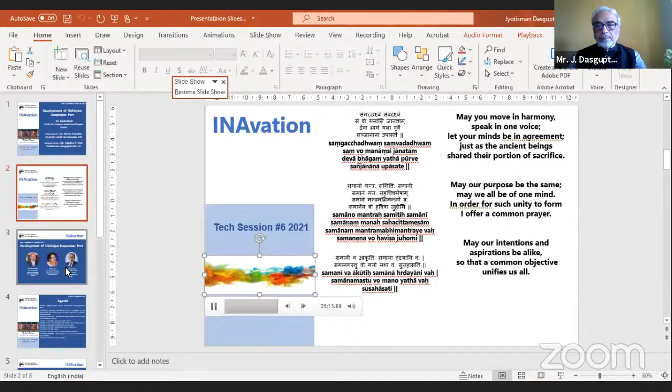Thank you very much. So we are indeed very honored to have Mr. Madhu S. Nair, Chairman and Managing Director of CSL, chairing the session today. And we are extremely honored also to have Dr. Malini V. Shankar, the Vice-Chancellor of IMU with us. The presentation is going to be carried out by Dr. Jayakumar, the Managing Director and CEO of Vizhinjam International Port.

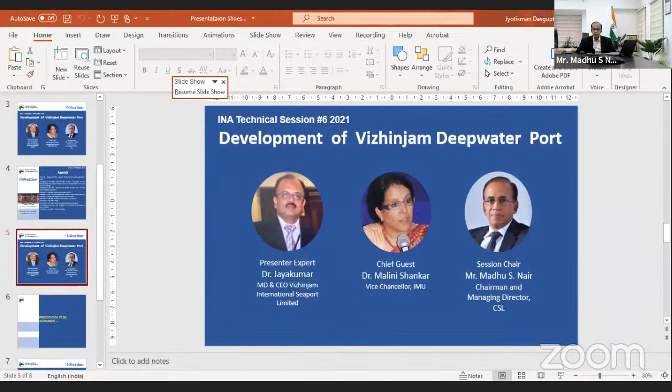For me, it's also a matter of privilege to introduce Dr. Jayakumar, whom I have personally known for long now. Dr. Jayakumar, again, one of the key personalities in the Indian port infrastructure space today. Today, he is Managing Director and CEO of the Vizhinjam International Seaport Limited. For us, coming from Kerala, it's a matter of added pride that this major seaport is coming up at the southern tip of Kerala.

I'll try to be brief when introducing Dr. Jayakumar, because his credentials spanning across the technical and the managerial space is extremely large. More than 3 decades of experience in the planning, design, and construction of ports and harbors in India and abroad. Dr.

Jayakumar is a topper from the University of Kerala in civil engineering, from the College of Engineering, Trivandrum, and subsequently he has done his MTech and PhD, both from the Ocean Engineering Center in IIT Madras. Started his career with the Kerala Harbour Engineering Department in 1981.

Served the government of Kerala in various roles, and in view of his qualifications and experience in the maritime sector, was appointed as Special Private Secretary to the Honorable Minister for Ports in Kerala in 2001, and Advisor Ports to the Government of Kerala. He has also had a brief stint with the Kerala State Maritime Development Corporation, and has been an active player in India's foray into the wave power space. He has been part of the IIT Madras Department of Ocean Engineering foray along with ANERT in this area. And Jayakumar was instrumental in conceptualizing, design, project structuring, and financing for the Vizhinjam International Seaport Limited.

So I have a few slides, but the way in which the project was introduced by Mr. Madhu Nair and Professor Malini Shankar, I think most of the points have been pointed out, I would like to say during the course of my presentation. So to start with, I would like to introduce my presentation with a phrase about our country: the future is here.

I would like to take you to a year where India would be by 2050. These are just my aspirations, and I hope many of you would concur. India would be a superpower by the year 2050, accounting for 25% of the GDP of 9 developed nations of the world. And now coming back to the present situation where we are.

What would India be by 2030? Indians would have reached every corner of the world, be it services, manufacturing, engineering, retail, or banking. Even now, we are in every part of the world.

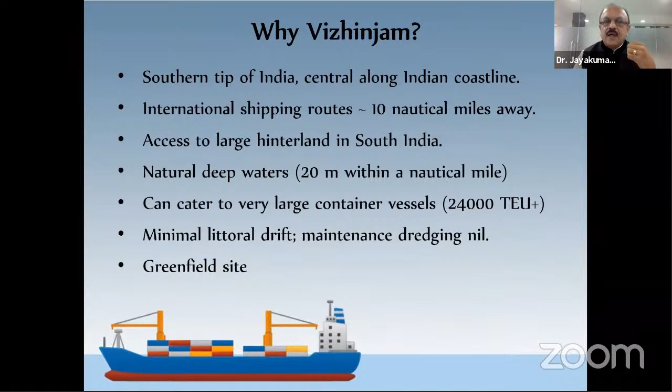As a result, the developer could have flexibility in designing the layout of the terminal, the berths, and things like that.

The same advantage is there for the Hambantota terminal, which is already there, but we have a lot of geopolitical risks associated with Sri Lanka. So Vizhinjam looks promising to be developed immediately as a transshipment hub for India.

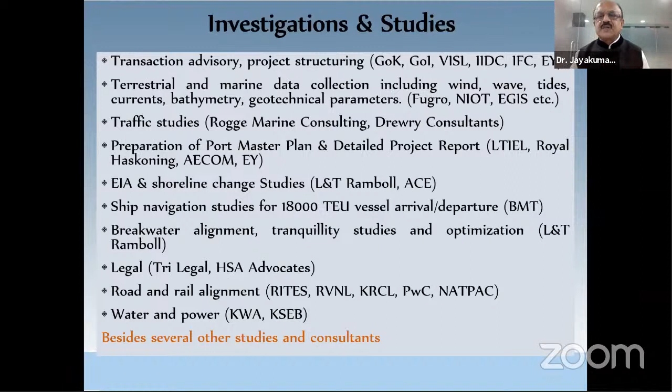Before the commencement of the port, we did a lot of numerical studies through various consultants, and we have seen that there is hardly any erosion that would happen as a result of the port development towards the north. Only some accretion would happen to the south of the port in this region. That is one of the very promising aspects as far as this port was sited at this particular location.

Coming to the explanation of this port, this is the first phase, which consists of a 3,100 meter long breakwater. This comes 300 meters away from the existing fishing harbor, which could be seen here. The port is being connected with National Highway 66 with a 2-kilometer road connectivity, and there will be a railway line connecting to the nearest railway station, Balaramapuram, which is 11 kilometers from this site.

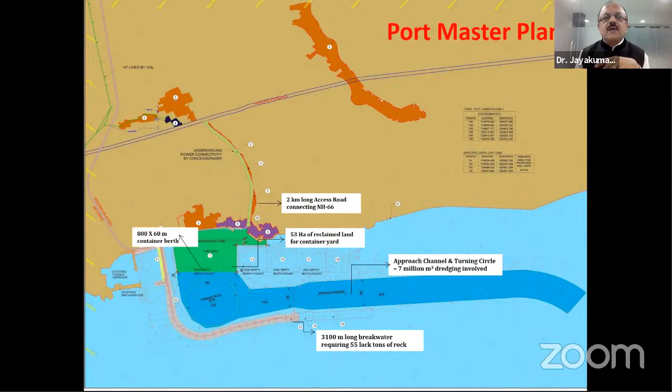The approach channel and turning circle involves dredging of 7 million cubic meters. This is the capital dredging involved, after which no maintenance dredging is required for the port.

This is the port in various phases. In the first phase, this port will be ready to handle about 1 million TEUs, and in the subsequent phases 2, 3, and 4, ultimately the port will be able to handle about 3 to 4 million TEUs, depending upon the efficiency of the cranes and other equipment which the concessionaire would deploy at the site.

As I mentioned earlier, this is our existing fishing harbor, and 300 meters away is the start of the breakwater, which is a rubble-mound breakwater that will be done up to this point in the first phase, for which government is investing. Out of the 7,700 crores total project cost in the first phase, 5,500 crores is being invested by the government of India, which is basically a commitment to develop the basic infrastructure, so that the concessionaire will only have to bring in investment for setting up the berth construction, reclamation, and the equipment for the port.

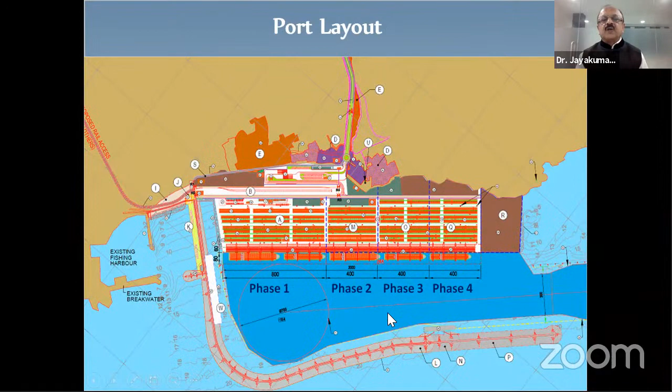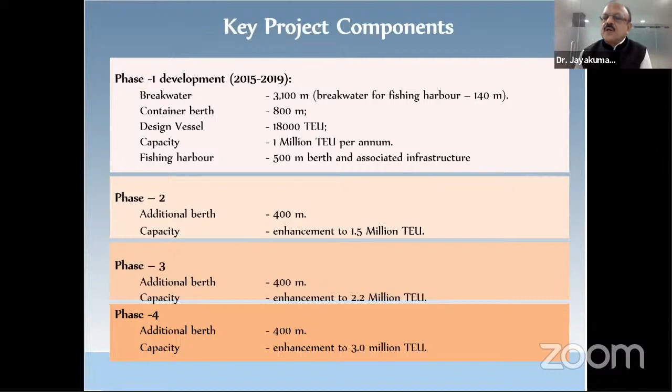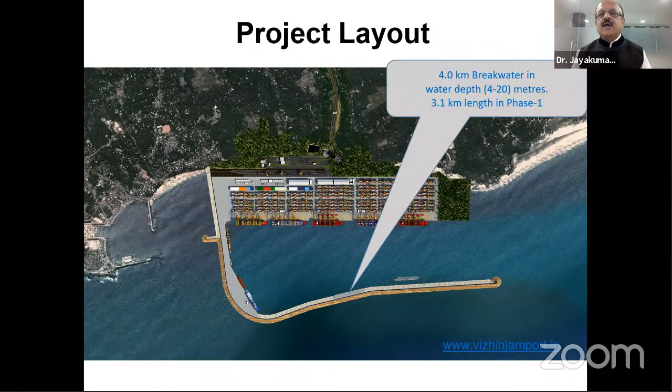So these are the various components in the various phases. The first phase will have an 800-meter long berth, which can cater to design vessels of the order of 18,000 TEUs, with a capacity of 1 million TEU per annum. This will subsequently be enhanced depending on capacity augmentation, which ultimately in the fourth phase, as per our designs, is 3 million, but the port will be able to handle up to 4 million at the end of phase 4. This is the master plan when developed in 4 phases.

It will have a 2-kilometer long container terminal, superimposed here on the Google map, with 110 hectares of reclamation, of which 53 hectares is in the first phase. There will also be a 500-meter long fishing jetty for the local community, because this region has the most densely populated fisher folk in Asia.

As a result of the project, the local fishing community has been affected quite a lot, and they have been and are being compensated by the state government through employment opportunities and compensation for their loss in fishing.

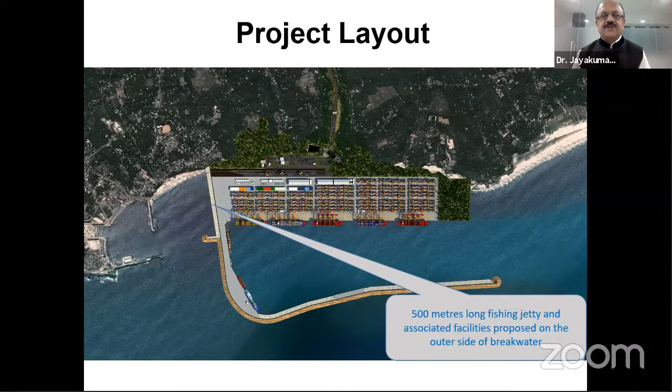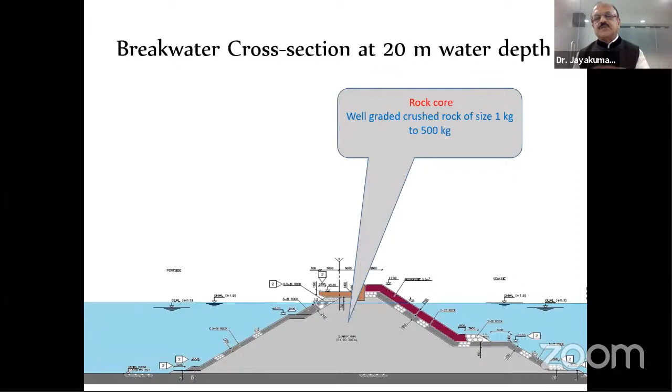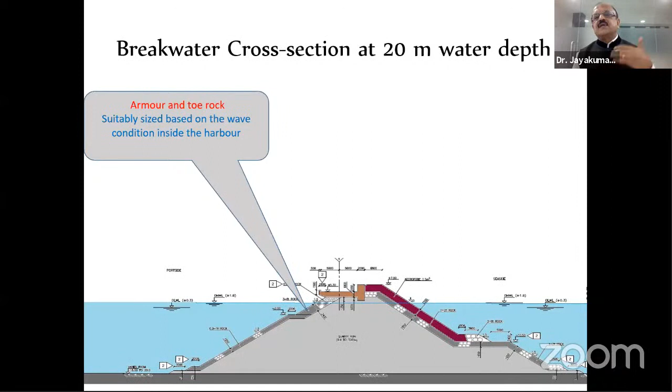This is a rubble-mound breakwater, and this is a typical cross-section shown at 20-meter water depth. The major portion will be the core, consisting of 1 to 500 kg stones, and the outer armor layer will be of various grade stones with 1 to 2 tons, 2 to 4 tons, and 3 to 6 tons.

On the outer face, where the breakwater takes the brunt of the waves, there will be concrete armor units, artificial concrete blocks called ACCROPODE, which are the patented concrete layer innovation of France.

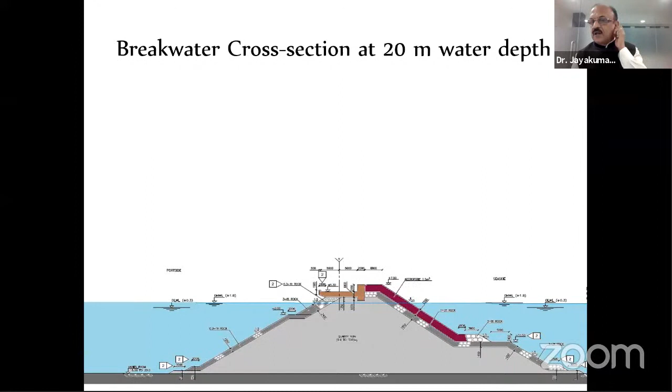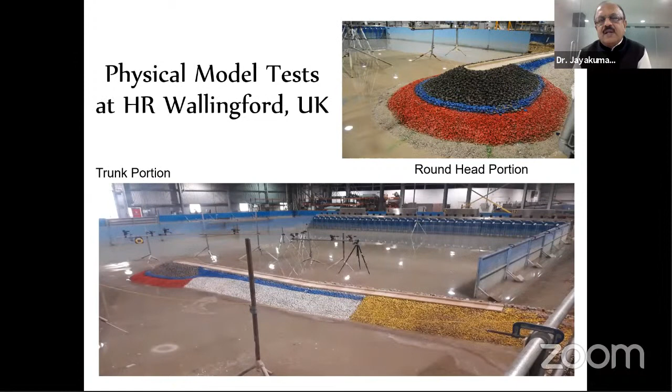The breakwater is designed by a Danish group called COWI, for which model studies have been conducted at HR Wallingford, one of the world's most advanced labs, located in the UK. So the model studies for the breakwater were done at the Wallingford lab, and the breakwaters are tested there for various conditions.

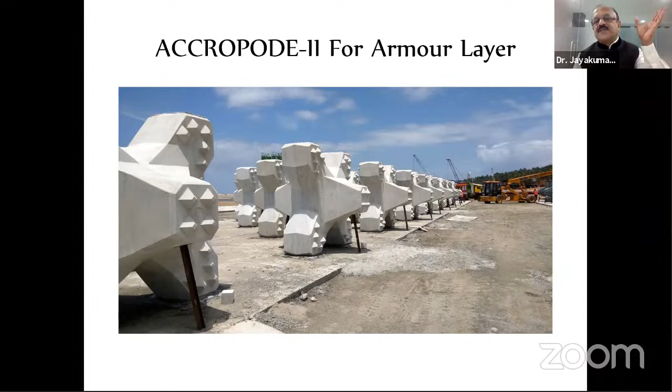These are the ACCROPODE, which are cast at site to form the outer armor layer to withstand the maximum waves, which can be of the order of 8 to 10 meters during extreme wave conditions. Each block weighs 13.5 tons and will be placed in 2 layers along the outer face of the breakwater.

So 40 plus 18 is 58 meters, plus another 5-6 meters above. That gives about 64 or 65 meters as the length of the pile, including the foundation pile that has gone below. On top of the piles would be the transverse beams and cross beams supporting the deck slabs, on which rails would be laid for supporting the container cranes to handle the cargo from the vessels.

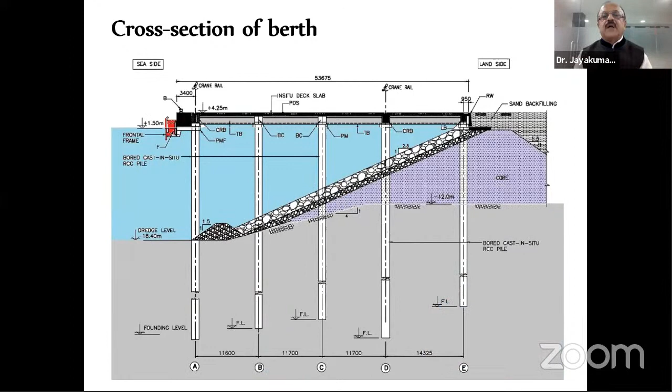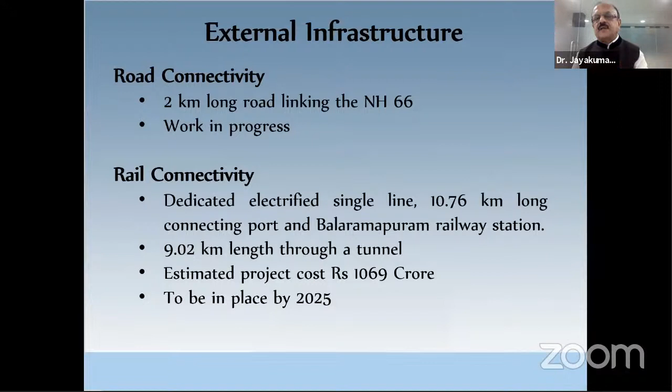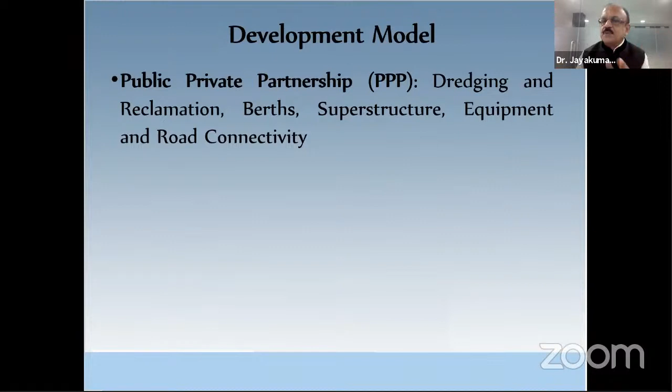Road connectivity, as I've mentioned, is a 2-kilometer road already in progress, and rail connectivity will be in place by 2025. The development model is through a public-private partnership, where the PPP component consists of dredging and reclamation, berth, superstructure, equipment, and road connectivity, which is being done by the concessionaire.

The state support is for the breakwater and fishing harbour, which is around 1,500 crores. Then comes the VGF, as Dr. Malini Shankar has put it - this is the viability gap funding.

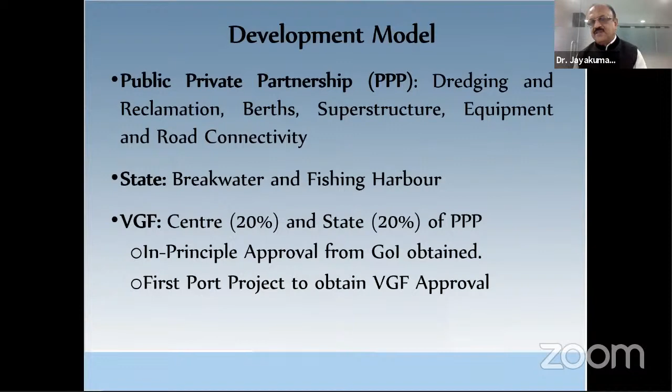This is the first VGF-approved project by the Government of India. The VGF funding component will be 20% from the Government of India, for which we are at advanced stages of securing this VGF from the central government. An equal share of 20% has to be put by the state government. This works out to 818 crores from the central government and 818 crores from the state government, together 1,635 crores, which was the bidding parameter quoted by the concessionaire in terms of grant. That grant is the viability gap funding to be given to the concessionaire during the stages of development and construction.

A concession agreement was signed based on the model concession agreement prepared by the State Planning Commission. The concession period is 40 years, including a 4-year construction and design period, starting from 2015 when the agreement was signed. There is an extension of 20 years depending upon capacity augmentation. The scheduled completion date was December 2019, and now it's delayed.

The cure period given to them is also over, so we have issued notice to the concessionaire for penalty or damages to be levied. They are going ahead with the construction, and we are also supporting them, because in the good spirit of the public-private partnership agreement, we would like the port to be built without further delay. This is the total cost of the project.

The 4,089 crores is for the total PPP component, and the rest goes from the Government of India and Government of Kerala. If you look at the total project cost, almost 68% is investment from the Government of Kerala, and only 32-33% is from the private sector. That is the commitment of the Government of Kerala with regard to the project.

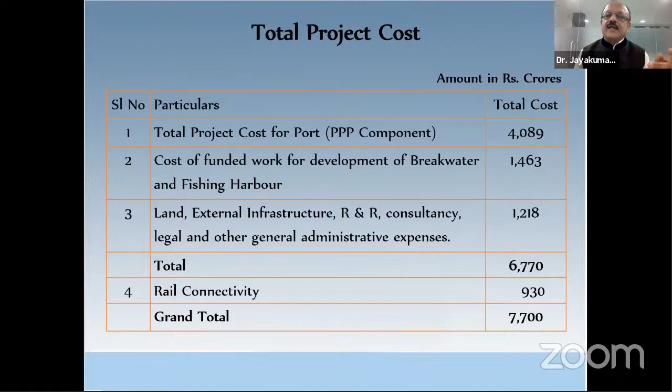For the land acquired and transferred to the concessionaire, we have already spent around 850 crores, including the land cost and the rehabilitation of the landowners.

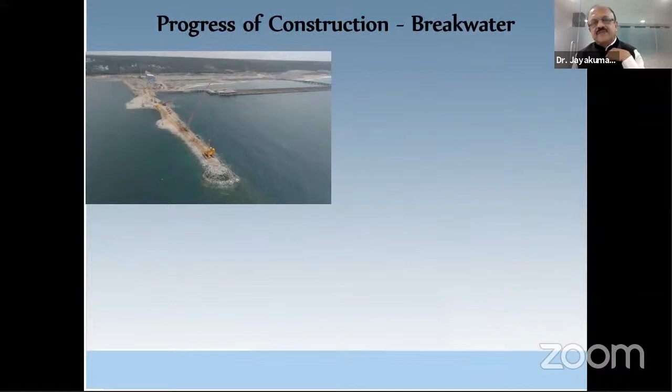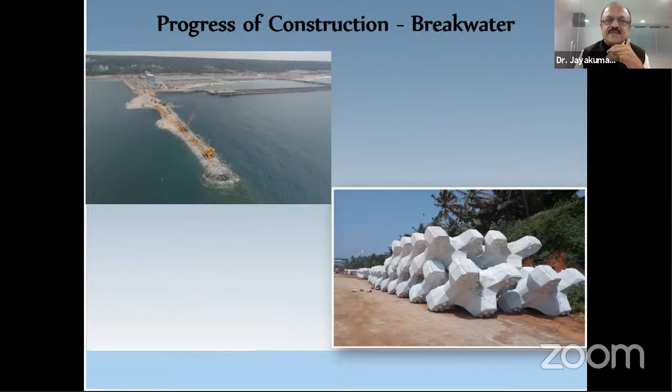This shows the progress of construction of the breakwater. On the left side you can see the breakwater, which is in progress, and these are the accropodes. Around 20,000 accropodes are required, of which around 11,000 are already cast and in place. Materials are already being stacked at site for the breakwater of various grades.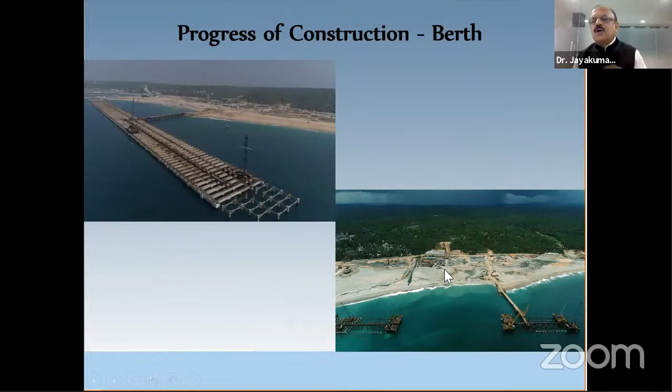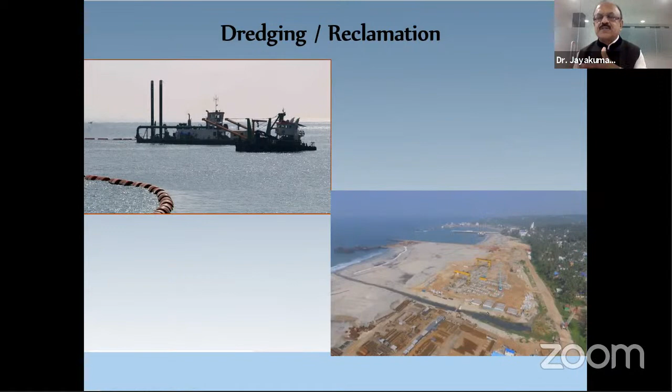On the right side you can see the reclamation, which is already done by the concessionaire. The shoreline can be seen behind it. This is the dredging to create the land - you can see the land which has been created. This was the original shoreline, and all this land has been reclaimed, but there's still a long way to go. About 60% of this land has been reclaimed, and the container facilities are all coming in. The railway yard within the port will come here inside, and other storage facilities and port administrative buildings are all in place.

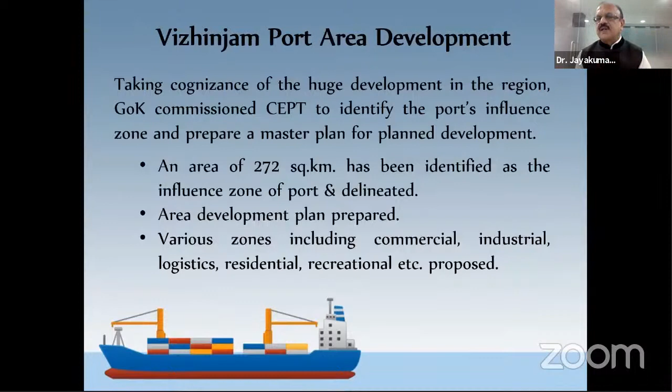Taking cognizance of the huge development in the region, we identified and deployed the Center for Environmental Planning and Technology of Ahmedabad to do an influence zone mapping for the area. An area of 272 square kilometers has been identified as the influence zone of the port, and an area development plan has been prepared, delineating various zones for various purposes besides port development - zones for industrial, residential, or recreational use. This is the area which has been delineated.

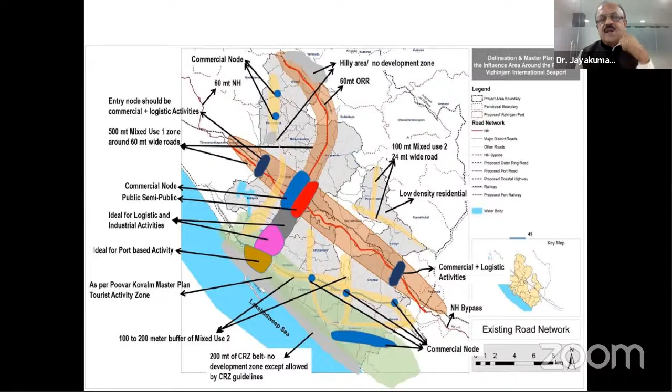Another initiative of the government is to set up a 2.5 kilometer wide corridor with a 60 meter wide right of way road bypassing Trivandrum city, to connect the port with the national highway bypassing Trivandrum. With the support of the Government of India under the Bharatmala project, the government is going ahead with this.

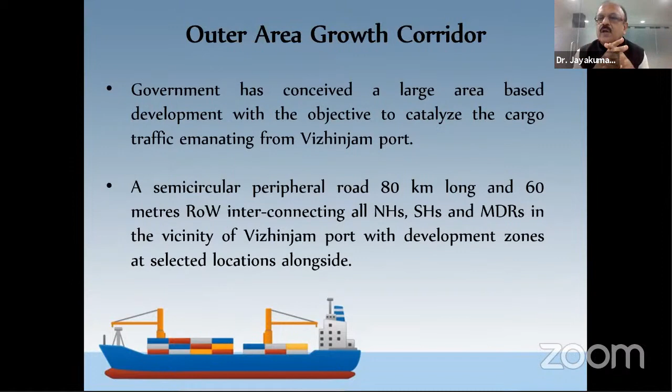This will have a 2.5 kilometer wide corridor on either side of the road, with zones for industries and development on both sides. This is also being done parallelly by the state government. This is the layout of the outer area growth corridor, which bypasses Trivandrum city to go to the next district, Kollam, from Trivandrum.

Vizhinjam, again, we are going to be a smart port. If you look at the challenges faced by ports today, we can bring it under three heads. The first is gigantism, concerning the ever-increasing sizes of vessels. Ship sizes are becoming large. To give an idea of scale, the largest container ships that come to the port are of the order of 400 meters long, equivalent to the size of 4 football pitches.

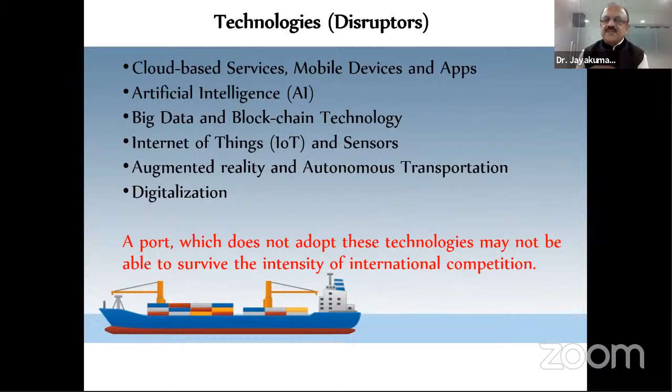Then comes augmented reality and autonomous transportation, for which you need a lot of innovations and technologies. So a port which does not adopt these technologies may not be able to survive the intensity of international competition.

If you look at the smart port concept, port environments have to become intricate partners - a link in the whole ecosystem that includes port terminals, authorities, shipping lines, trucking and logistic companies, and storage providers. This is the ecosystem we can see. To be truly effective, stakeholders have to do more than simply adopt these technologies on their own - instead they have to be part of it, embracing platforms and services that make it easier to work together on the same platform.

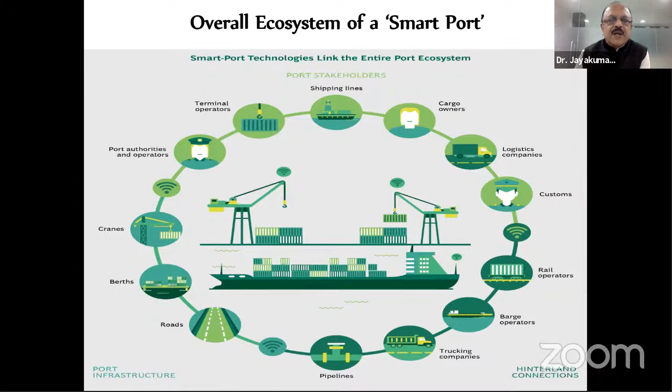These platforms and services will let individual partners expand their businesses without adding substantial new infrastructure or equipment. This is the sort of smart port being thought of, but only discussions have started. In 2 years, when the port operations are in place, Vizhinjam would be a smart port to look at, with state-of-the-art technology, serving as the prime transshipment terminal of the country.

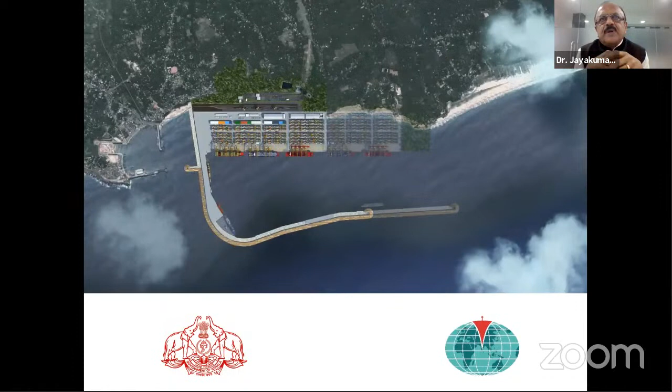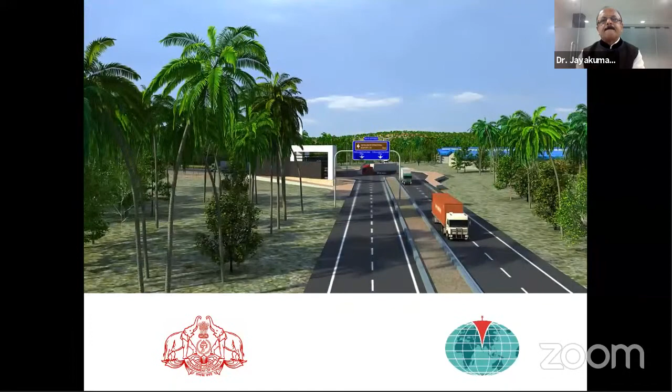This is a small animation of how the port would look when fully in place and operational. This is an animation made to scale to show the infrastructure once it is in place. This is from the National Highway, a 2-kilometer road to the port.

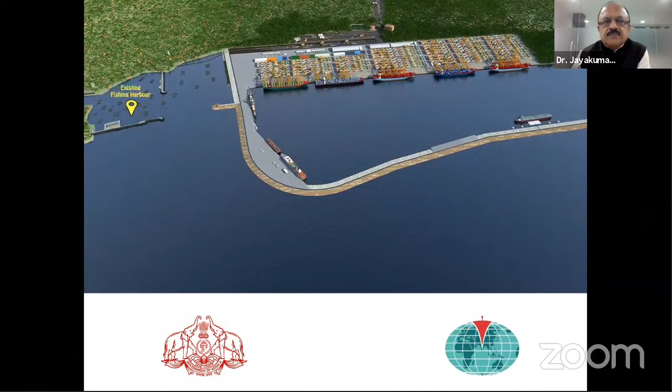The cruise berths are planned in the subsequent phases.